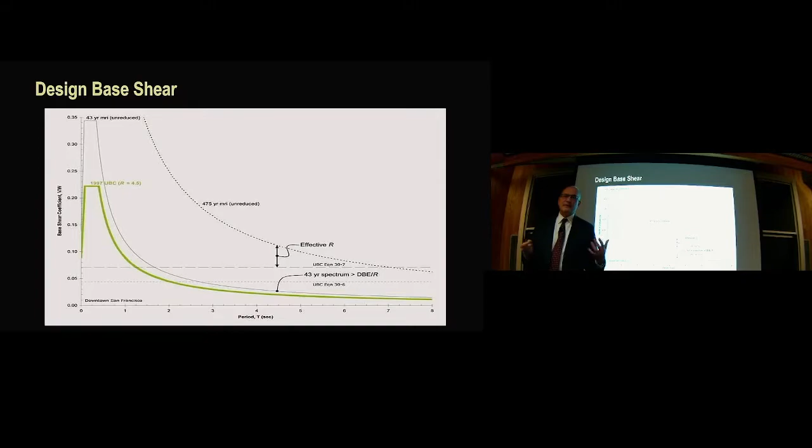This is the 2020s, and we're still doing it that way. The prescriptive design of the code, that's what we do today, for even our most important buildings. I say hogwash. We have changed the way we go about our business. We have stronger computational tools. We have better and deeper methodologies that allow us to more rigorously understand building performance. So why are we still handcuffed with 'oh, my building doesn't fit into the R factor table, so I can't build it'? Nonsense.

Another example in seismic engineering, and my favorite example. This is going to sound like I'm being very critical of the building code, but that's not the point. The point here, again, remember, is why. Why does this thing exist? Why does R exist? If you understand why it exists, now you have an opportunity to question it and have a basis for thinking differently.

My most favorite example, a little dated, it's ASCE 7-10, but believe me, the same thing exists in 7-16, and has existed in the code since the 1961 code. There's these magical tables, just a little excerpt. Special reinforced concrete shear walls are limited to 160 feet in height. Why?

Where's the science behind 160 feet? It seems like a really weird number, and it's really precise. Where did this come from? Why is it there? This is the question, why. So this is back in the 1990s, I got this bee in my bonnet trying to figure that out. Where did this come from? Why is it there? Well, it turns out, this is the true story, it's amazing.

In the 1920s in Los Angeles, the city council decided that they didn't want to see the Manhattanization of Los Angeles, meaning they didn't want very tall buildings creating deep canyonous roads with shadows everywhere. They wanted the buildings to be shorter, to let the sunlight in and the palm trees grow, and be Southern California. So they imposed a height limit of 150 feet in 1920 in Los Angeles.

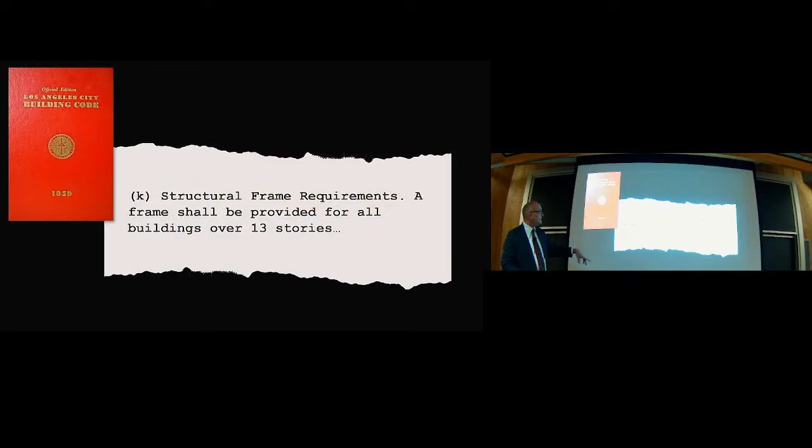So there's this intersection of two cars going in opposite directions. But that's where 150 feet came from, Los Angeles. That's what the structural engineers started to put into the code. Here's the 13 stories in the code in 1959. And then in 1961, it became 13 stories or 160 feet.

160 feet. Where did it come from? It's a typo. I'm serious.

Today, in ASCE 7-16, special reinforced concrete structural shear walls are limited to 160 feet. Why? Because of shadows in Los Angeles in the 1920s and a typo in the 1950s. That's why. Science, at its best.

I love that story because it's true. I found the committee meeting notes that talked about what to do. We'd printed all the code books, and they said, we don't know it well enough, leave it alone. Moses from the mountaintop, right?

It turns out structural engineers were really good about setting up hurdles. And we feel really compelled to jump one after another, going from this end of the racetrack to that end, jumping all those hurdles, which are those building code provisions.

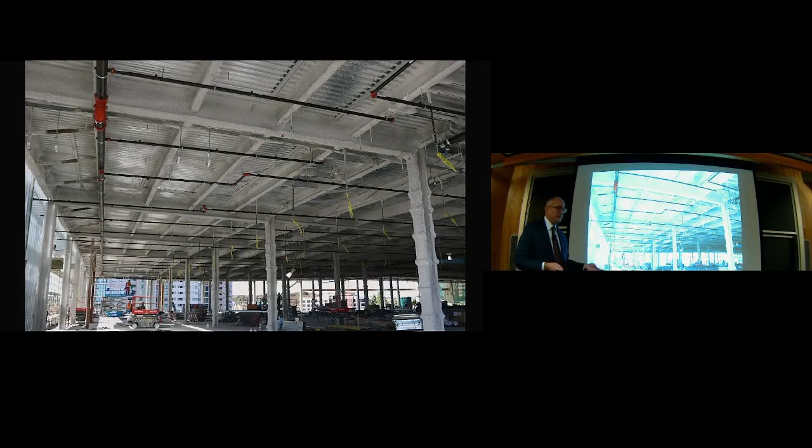Preponderance—interesting question. In fire engineering, we spray fireproof all these steel beams and columns, and then we put the sprinkler system in. Does anybody know why? Because the code said so. Yeah, but outside of the code saying so, do you really know why, and what each of those measures is trying to accomplish?

And if you knew why, might you go about your business somehow differently? So again, ask yourself why in your daily work for each of these things. All right, that's number one—enough examples. Why, right? So we're going to move on to number two.

He's our broker, he helps me capture all our money. Can you pay him? Of course. How much? I don't know exactly. What if you're not happy? Does he have to pay you back? Nope. Why not? It doesn't work that way. Why not? Are you asking enough questions about the way your wealth is managed? Wealth management at Charles Schwab.

So secret number two is not Charles Schwab, and it's not money management. It was captured by the voice of a little kid who asked, why not? That's secret number two. If you can get past hurdle and secret number one and understand why it's there, now you have a basis to ask this question thoughtfully: Why not? Why not do it differently? Why not take a different approach?

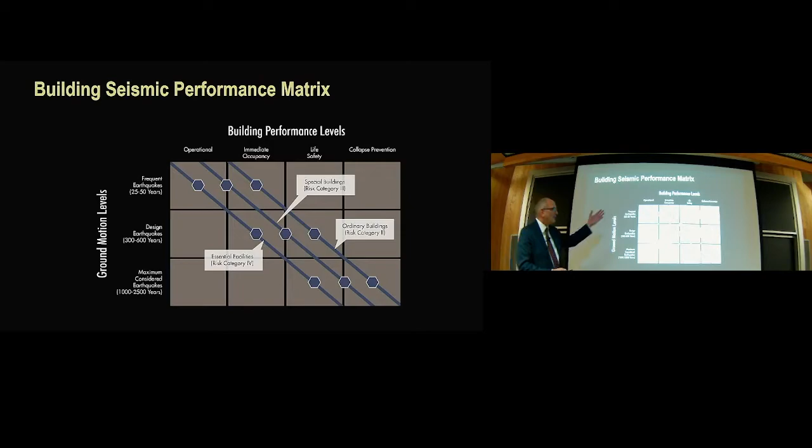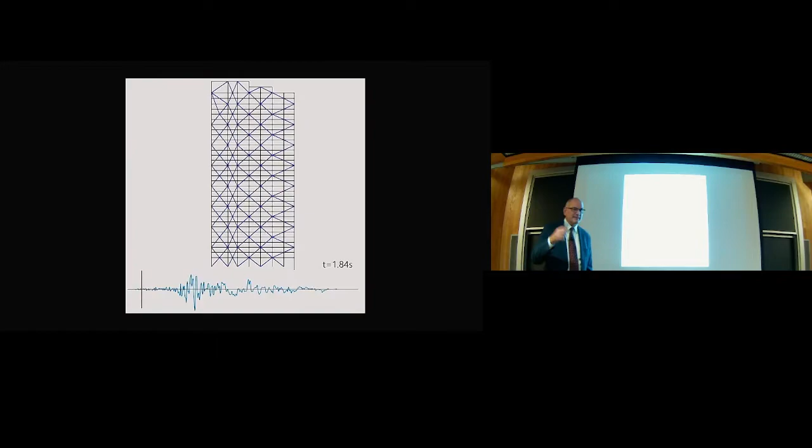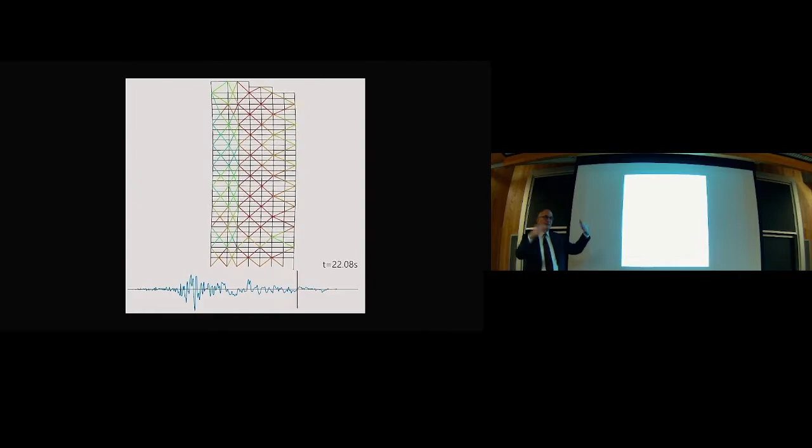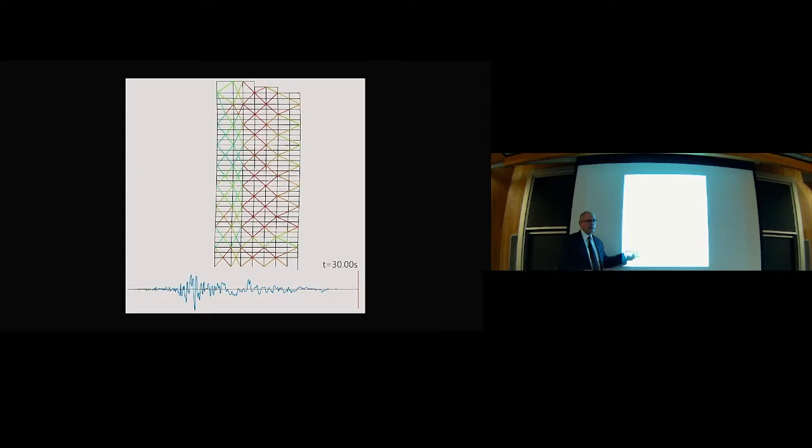But the whole point of this diagram is this has been around for decades in seismic engineering. Let's adapt a similar train of thought to other hazards. And we have the tools. In seismic engineering, we can take a simple 2D frame, subject it to a ground motion, and understand the nonlinear behavior of that 2D frame. We can do this in 3D easily. We've got all kinds of tools to do this. We can define ground motions, mine them from databases, and interrogate our buildings to any number of hazards with real rigorous analytical techniques, and we can better understand how our building's going to perform. Why not?

This is back to the hurdles, right? Are we going to jump over all the prescriptive rules in the code, or are we going to run in a lane over here where there's nothing in our way and we go fast, getting to the same finish line, only much better and much faster? But we use science and math and first principles and the tools available to us.

The resultant comes out to things like this. The Tall Buildings Initiative, which we wrote a number of years ago - we being a group of people - was a consensus document amongst practitioners and academic researchers to define a new methodology for seismic design of tall buildings. This is the state of practice today. It is now the standard of care on the west coast of the United States and in other places around the world that use our guidelines as their basis of practice, like in Chile, the Philippines, or the Middle East. These guidelines have spread worldwide, opening the door beyond prescriptive design into the world of performance-based design and more rigorous engineering methodologies.

So we ask the question, well, why not? We have all these tools, we have the knowledge, why not do it? So we are. It's a fantastic success story.

So back to my wind proposition or question: why, for a 2,000-year return period wind, can't I allow even a modest amount of yielding in my building? In fact, it could be a good thing. Just a modest amount of nonlinear behavior does a lot in terms of absorbing energy. And we have the ability to tune the system to behave in a way we can control and want to achieve, as opposed to hope to achieve. The good news is today we have the tools to do this - we have the tools to do linear and nonlinear response time histories for wind.

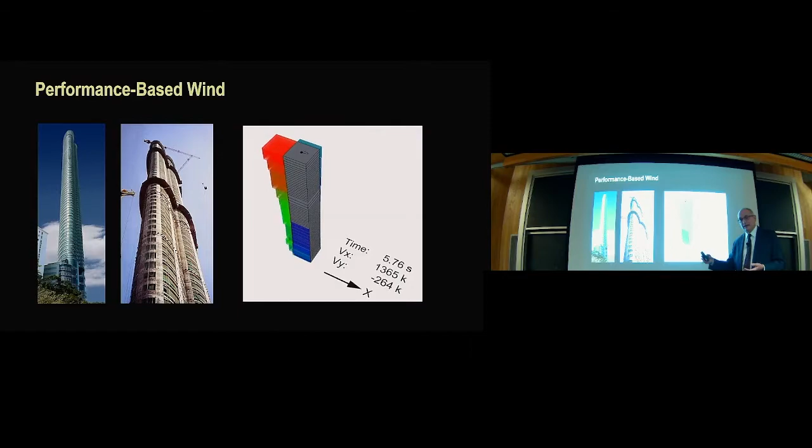We're in the beginnings of this adventure. We've been practicing performance-based seismic design for 25 years.

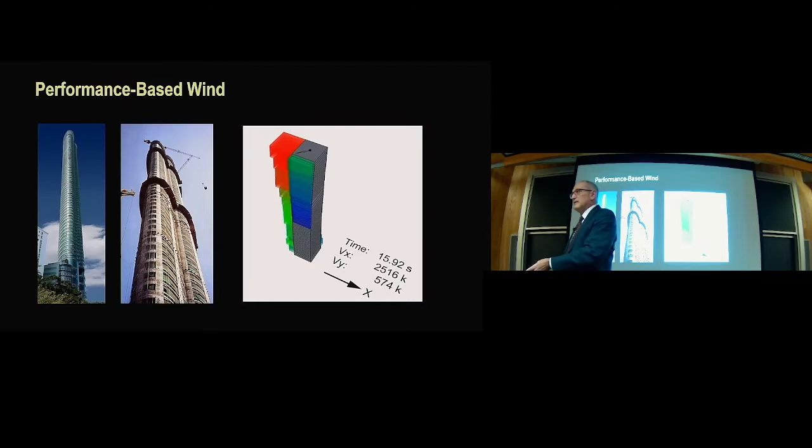Last year we published this—who's we? ASCE, SEI, the Pankow Foundation. A group of people got together and we wrote these guidelines for performance-based wind design. The whole point is to create a framework that's non-prescriptive, that allows a structural engineer to allow some modest amount of nonlinear response in your structure in extreme wind loading events.

And in doing so, you can spin it however you want. We're going to save money. We're going to make it easier to build. We're going to make it safer for construction workers because there's less things in the way. Or the greatest thing in today's language, we're reducing embodied carbon. We're doing all of that because that's what this unlocks the door to.

So again, why not? Why not do it that way? Why be hamstrung and handcuffed to the old way? Why not think differently? Back to the fire engineering, same question.

We asked, why is there spray-on fire protection and there's a sprinkler system and we have this 1 hour, 2 hour, 3 hour, 4 hour rating thing? Why? And if you peel that onion back and start to understand why those parts and pieces are there...

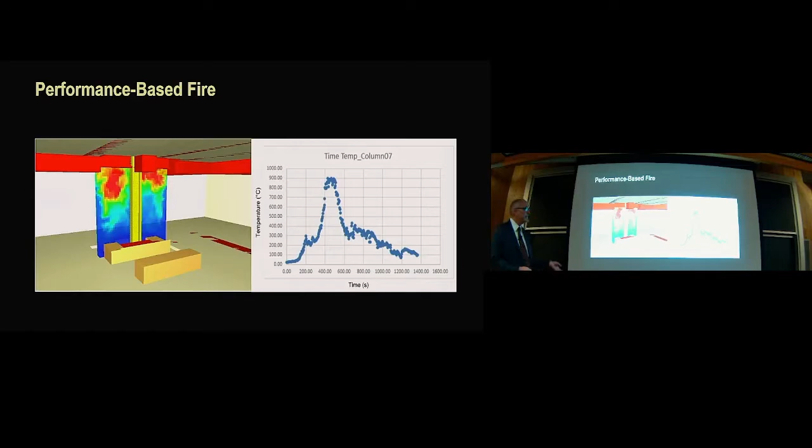...it opens the door for you to do performance-based fire design, where you're looking at actual loads in the building, the amount of combustible material in the building, creating it as a load case for the structure, and then analyzing the heat transfer in the structure to understand what's going on with the columns, beams, and slabs, and what that heat is actually doing, and then responding to it with a design—instead of not responding to it at all and just spraying it with Monokote, because then I don't have to think about it.

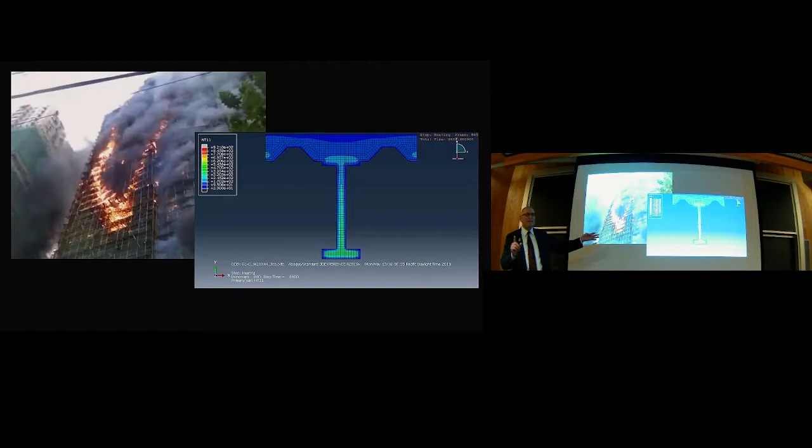The state of practice is moving in this direction slowly. This is frightening to a lot of structural engineers because they don't teach us this in school. Well, they're starting to—there's a few schools that are starting to teach fire design as a structural engineering course.

I look at fire as a heat load case. It's nothing more. It's nothing to be more frightened of or less frightened of than an earthquake, a windstorm, or a tsunami. We can deal with all of those already. Why don't we deal with heat? That's all it is. How does your building respond to the heat?

Oftentimes what's critical is the cooling. As the building cools, after it has expanded, a lot of things move around and restraint is created, and that's when things break. So how do you go about designing your building for that? And perhaps in doing so, get rid of some of the spray-on fire protection.

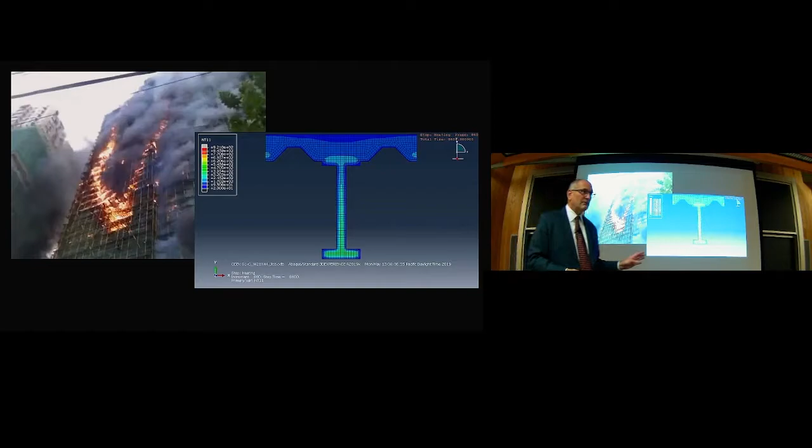Why not? Why are we not doing this? We should. We will.

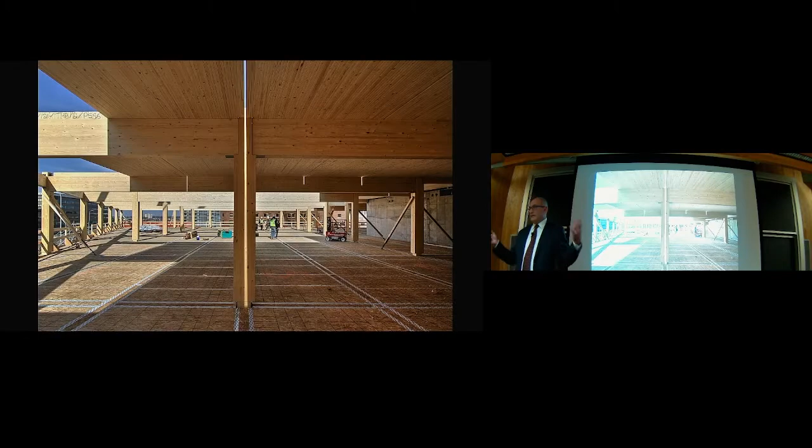I've designed a bunch of heavy timber and mass timber buildings these last few years—one right here in Minneapolis, not far, over by the Twins ballpark. It was the first ever commercial office building in the United States built of mass timber. They're beautiful, gorgeous buildings. You go inside and think, I love this place.

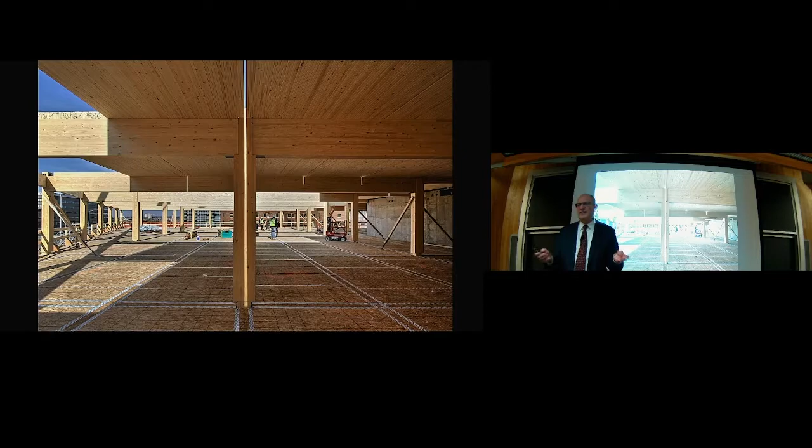From an engineering point of view, they're actually very simple. Everything's a simple span—wood really doesn't like to cantilever. The spans are really short. It's kind of a yawner from a structural engineering point of view, but they're beautiful. So we're doing a bunch of them around the country. And the one thing we've learned as we've designed these buildings is that the thing that controls the design most often is deflection.

And what is the salient parameter for deflection? It's the modulus—the modulus of elasticity of the wood. Okay.

Why don't we grow a proper forest to build buildings with? I'm talking about genetic engineering. Why don't we grow a tree that has a proper modulus to build a building? Because today what we do is go out in the forest and whack down a bunch of trees.

Did anybody see or read the book, or see the movie, Moneyball? It's about the Oakland A's. The whole premise of the story was that old school baseball was all about visual scouting—I like this kid, let's sign him up. Moneyball was all about putting science and statistics to work to grade minor league players to put them in the big leagues. And it worked. They transformed baseball because they went from visual grading to scientific grading.

Why don't we do that in the wood industry? Because the wood industry is still visually graded.

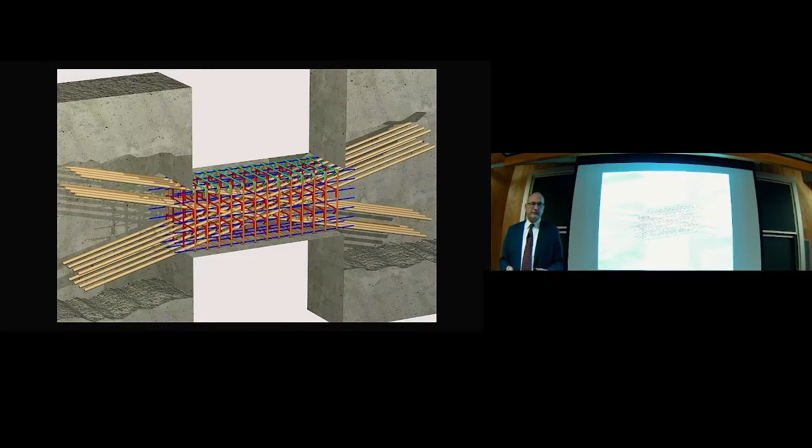And we're doing it together. We're not doing it even though our firms might be competitors for the design of a project. There's a bigger mission here. We're trying to improve practice. So the TBI guidelines were an example of that. That was a collaborative effort. We reinvented how you design and construct reinforced concrete coupling beams in seismic zones. A very big research effort at UCLA and extended now to Washington State University and University of Cincinnati.

High strength rebar is now in the code, up to grade 100. This just didn't happen by chance. This was a group of people who were passionate about wanting to advance this technology, competitors who got together. We got a bucket of money together. We did a bunch of research over 5 or 7 years, and now it's in the code. And so all the high strength rebar, grade 75, grade 80, grade 100, you can do it now, it's in the code.

Research, I mentioned SpeedCore - Professor Bowman, Professor Kreger. We started 15 years ago in the lab at Purdue, been working with Professor Varma more recently in the lab at Purdue, advancing this technology. All this stuff is public domain, none of it's proprietary, with intent, because we believe that the system is efficient and effective, and if more people would use them, it would be great for the world, we think. It is now in the code. The impediment at the moment to building these composite plate shear walls is just habit.

The structural engineers practicing by and large today, it's something new. Got to learn something new. It's different. It's not like I can push the button in ETABS and out poops the design. You can't. You actually got to think about this one. But, sorry, my computer's showing me funny things.

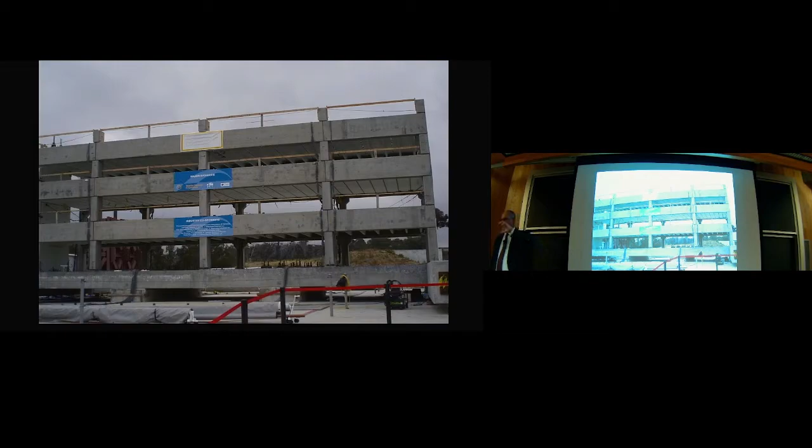Okay, we're back on track. A number of years ago, you might remember there was a Northridge earthquake, and a precast parking garage fell down in that earthquake. As a result, there was a huge research project launched, lots of testing done, lots of people got involved, and the precast industry was improved forevermore through that collaborative work.

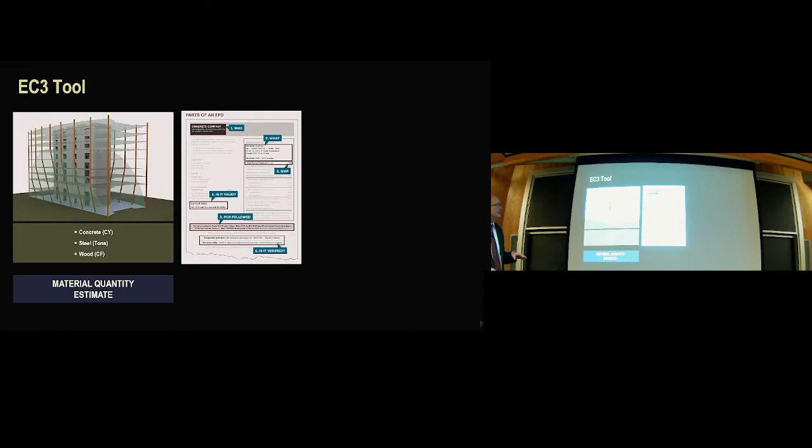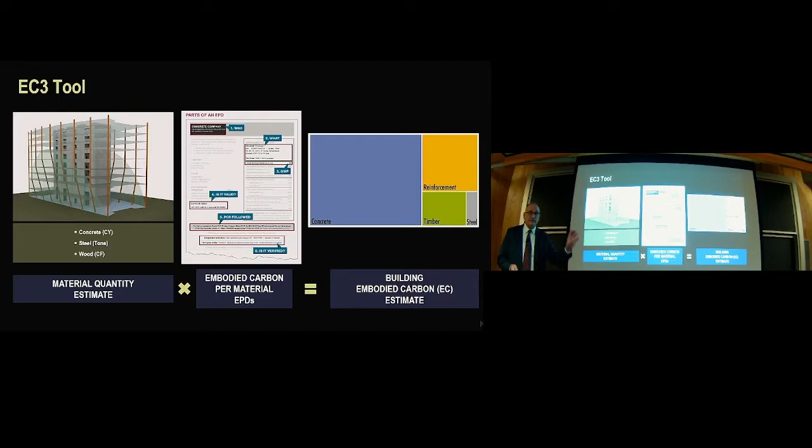In the world of BIM, there's been a lot of work done. In the world of water, this is all about life cycle. Carbon reduction is a big topic these days. This was a collaborative project on LCA assessment of buildings, initially started by Skanska, but then joined by a whole cadre of supporters from the Charles Pankow Foundation to Amazon to Facebook—all the tech companies got involved to fund the creation of what's now called the EC3 calculator. If you haven't seen it, I encourage you to look it up. It's a public domain tool that allows you to assess the carbon content of your building via a connection to a national database of EPDs for all kinds of materials. So if you're wanting to do things in embodied carbon, that's a place to go.

So we had: one, why; two, why not; three, collaborate with your friends and colleagues to make something happen. Now I'm going to go full circle back to the beginning when we started this conversation. You'll remember I talked about imagining you have this idea. But all too often, what happens with an idea? Wham, ran into the brick wall. Can't get it done for whatever reasons. So what do you do? You go back to your office and do it the way you always did, the way it's always been done.

So I want to paint for you the alternative universe. We're going to imagine we have this idea, whatever the idea is—and I've got 20 more to share with you later, maybe at the reception. But we have an idea.

And now we need some money. Ha! But lo and behold, I know where to find the money. Send me an email, I'll connect you with the money. There is money to be had, and the number of people willing to fund advancement in structural engineering and building design and construction is growing. So there is money available. And I can assure you there are lots of enthusiastic, especially enthusiastic young people in our industry who really want to save the planet. A lot of what we need to do in our profession right now is use our tools and all our smarts to work toward that end—saving the planet from carbon.